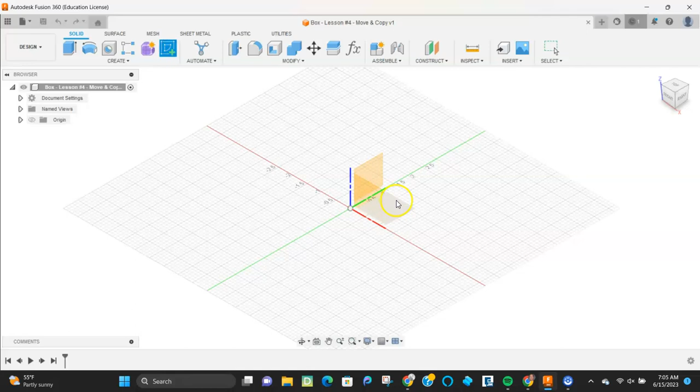We're going to create a box, but differently than we've done before. We start off as we have in the past, making the bottom first. We create a rectangle with our dimensions, specify them, finish the sketch, and extrude up that bottom component to our stock thickness. In this case, we're going to do 0.5 again.

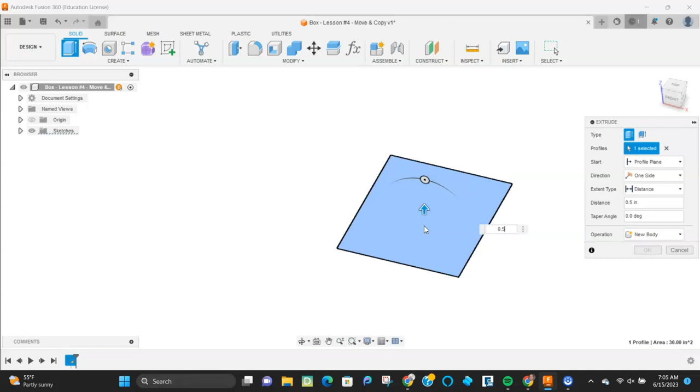What we're going to do differently this time, instead of drawing on the actual sketch face of our bottom, is take our standard sketch plane and make a rectangle that will be my side, then move it into place. I'm going to specify a rectangle with the correct thickness and length, then hit Finish Sketch.

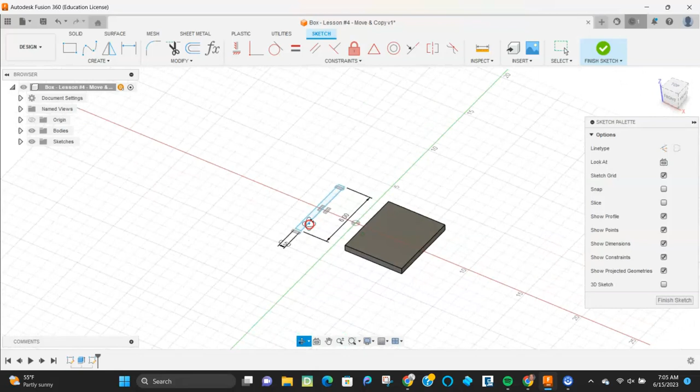You can see that it's not attached to the box. I'm going to click on the profile and bring it up to be the right size. Now what I need to do is move it into place.

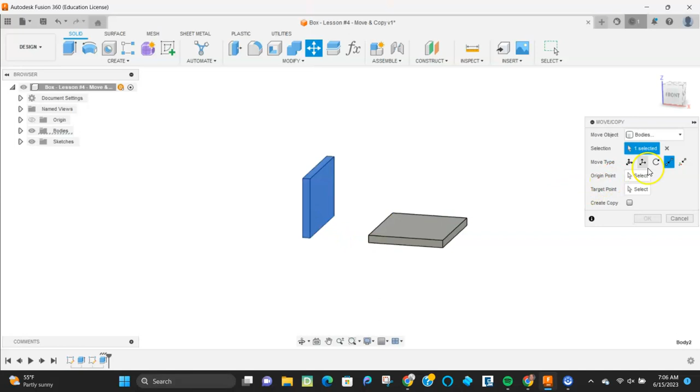I have different move options. I'll click the move icon at the top, make sure the body is selected, and see my different options. In this case, I'm going to go point to point. So I click on the body, zoom in, and try to move that vertex of the box to another point.

You can see there I did it incorrectly - it's not lined up the way you'd want. So I can either edit my timeline or select it again by hitting the body, then hit move and do point to point again. I want that point to move there. Now I have my side in the correct spot.

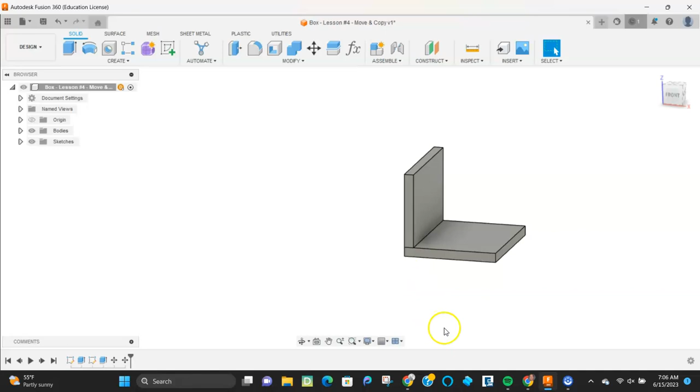So I've moved it into place. This is going to be powerful as you start to create objects that you're bringing into your sketch.

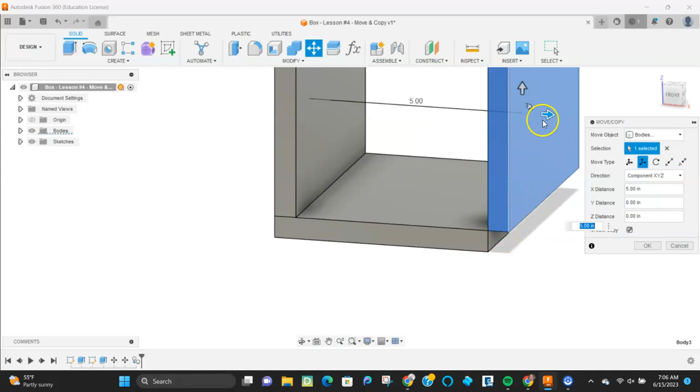I'm going to hit this and move, and now I'll hit check create copy. So when I do this, I'll have the ability to have a copy of my object move across. I'll try to drag it across to see if it'll snap in - I can see I'm not getting it to snap very well. I can zoom in for a more fine-grained piece.

Or again, what would be more powerful would be to create a copy and hit move point to point. So I select the point that I want, then select the destination point, and now I have a copy of that side moved into the correct space.

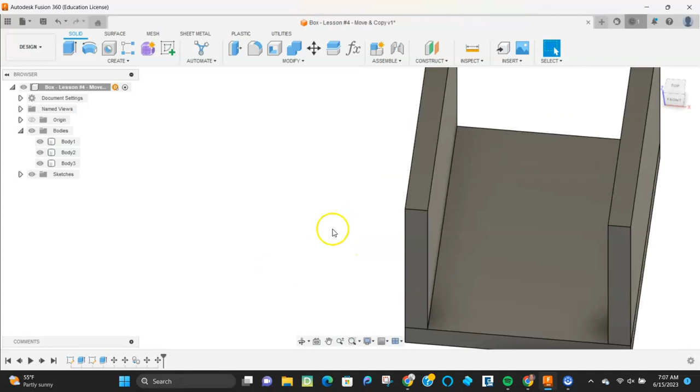We're going to do the same thing again with the front and back of our box. So we're going to create a sketch, and I need to know what that distance is, so I can use the inspect tool to measure that it's 4 inches across.

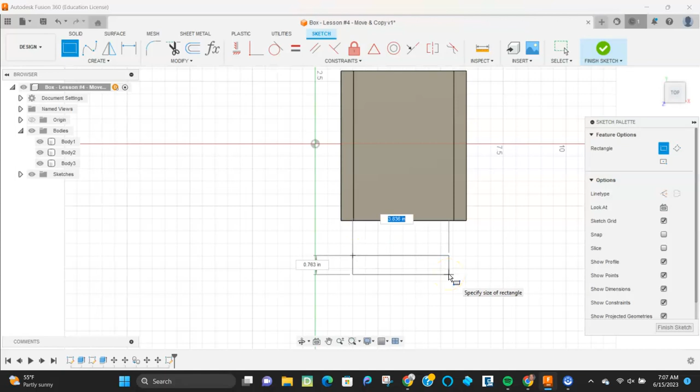I'm going to hit create sketch, then move around to get to the same plane I had before. I'll create a rectangle - I just figured out it was 4 inches across, and it's going to have the same thickness as everything else, so 4 and half an inch for our thickness. I'll finish the sketch and extrude it up.

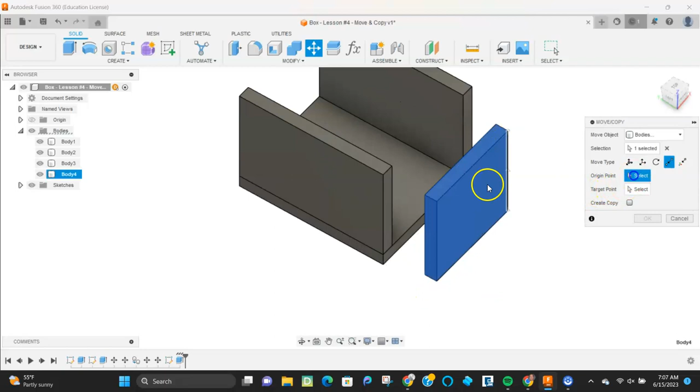I'm going to bring it up to the correct distance, 4 inches. Now I want to move that into place. I'll click on the body I want, select the point I want, then select my destination point and hit OK. There we go.

We put that part of our box into place. We're going to do the same thing again, but this time create a copy, and I'll find the origin point that I want. You can see it's a little bit hard to see to get the right thing.

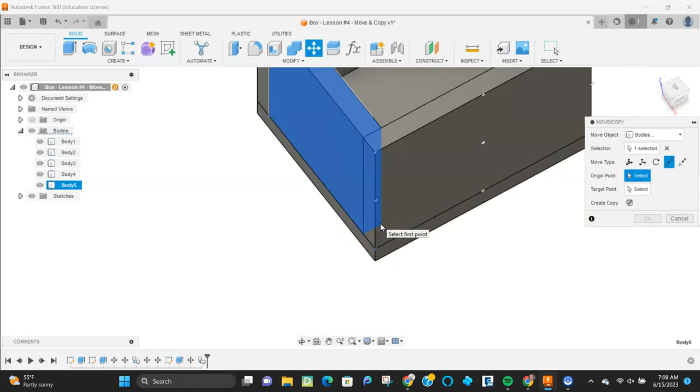I can actually turn some bodies off if I need to, so I can get at those pieces, or I can try to rotate around to where I can see it. So I'll deselect the body that's there so I can go in and find the origin point that I want. With some manipulation and zooming in, I'll grab it and move it to the position it needs to be. There we go.

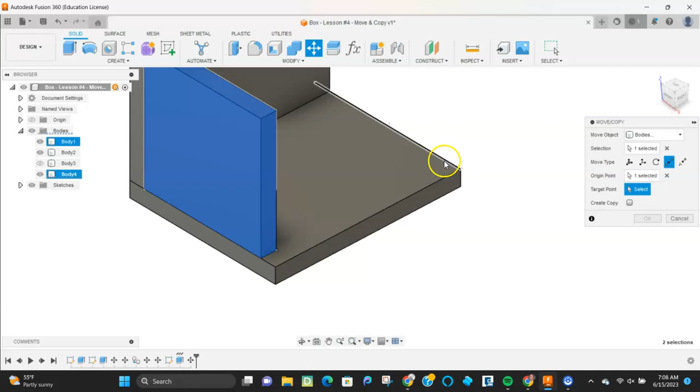We've grabbed the origin point that we want, and I'll turn that body back on because I need it for the destination point. I'll zoom in, move it there, and hit create copy so I don't just move the original component. There we go - we've created a box again using our different commands to basically move pieces into place as we created them.

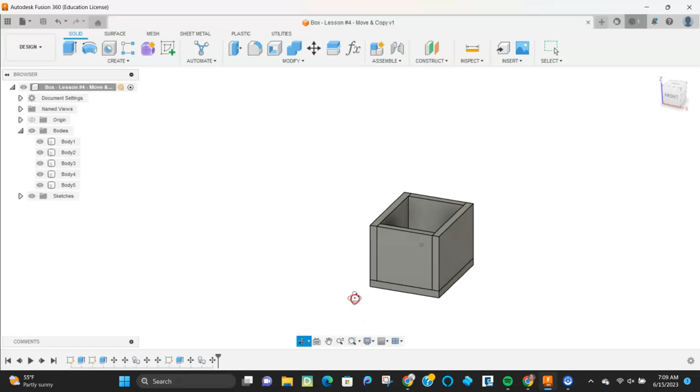Now we're going to take the bottom and move it to the top, which will be the lid of our box. I click the point that I want, move it to the top, and create a copy. There we go - we have our completed box.